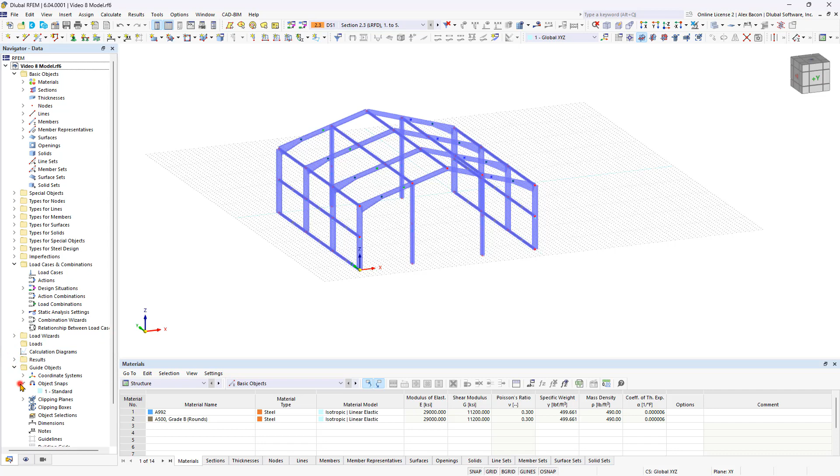In the Data Navigator, under Guide Objects, right-click the standard object snap to edit it. In the new dialog box, you can find the list of all available object snaps on the left. Here, you can create new ones and edit existing ones. Under Objects, activate perpendicular and intersections if they are deactivated.

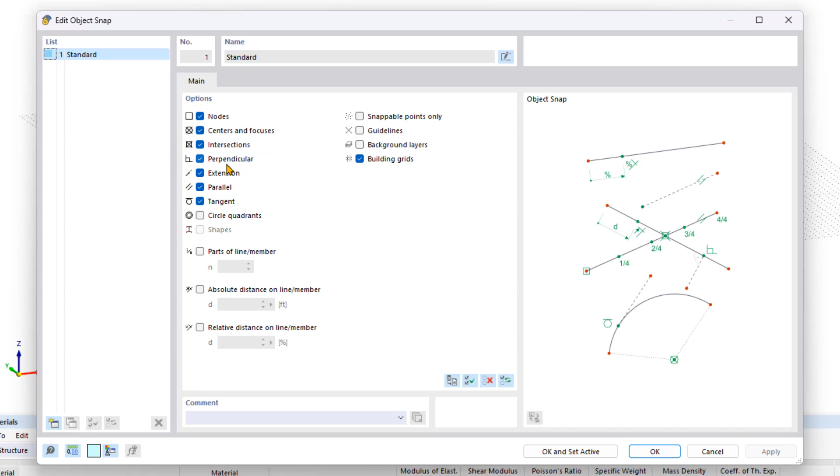Confirm the change and create a new member for the transverse stiffening. Instead of redefining the member properties, you can import the properties of an existing member by clicking the respective symbol.

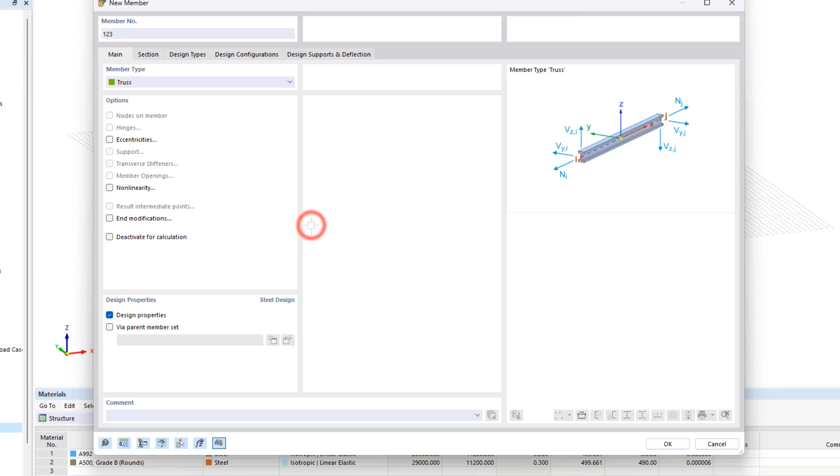Add the stiffening members to the structural model by clicking the desired points one by one, and then exiting the input by right-clicking. Ensure that you snap to the nodes and object snap marks accurately.

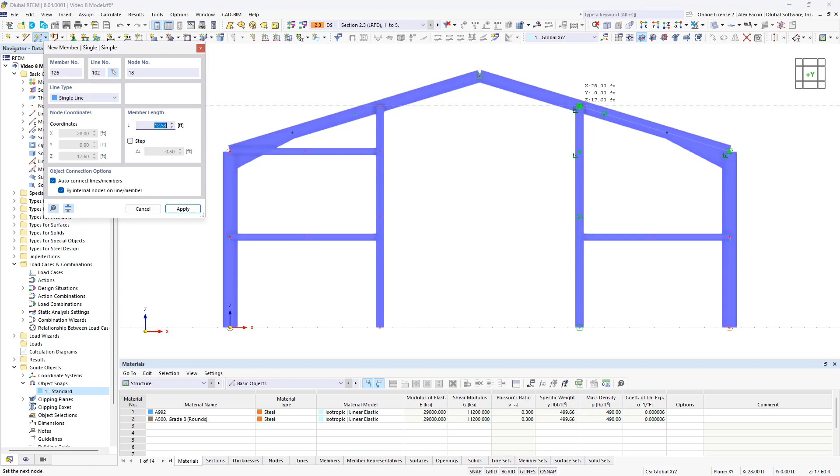By modeling the stiffening members, red nodes have now been created for two of the members in your structural model. These red nodes represent topology nodes. To assign these nodes to the columns, double-click them to change their type. In the dialog box, select the on-member node type from the list and choose the desired member and node location.

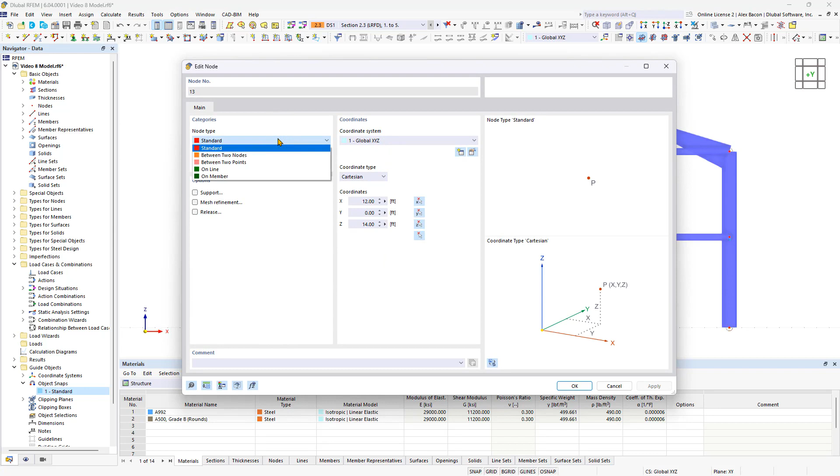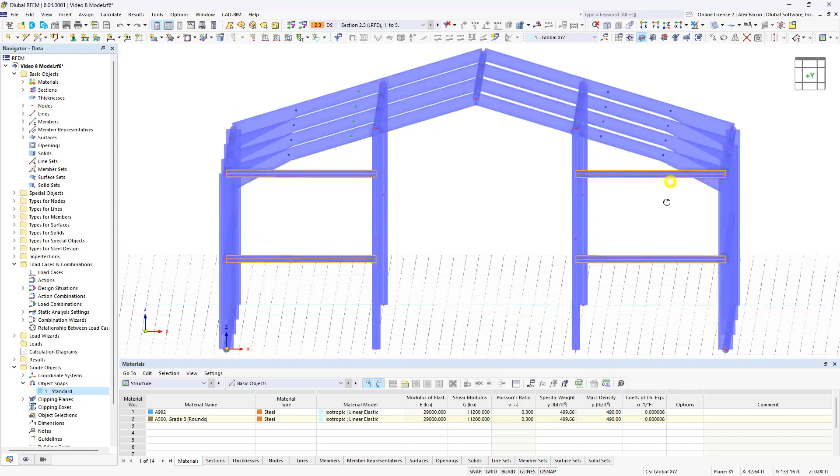Set a view that allows you to select the inner members of the frame with a single selection window. To copy them, drag and drop them to the desired position while holding down the Control key. We also need to make sure to change the copied nodes to on-member nodes as well.

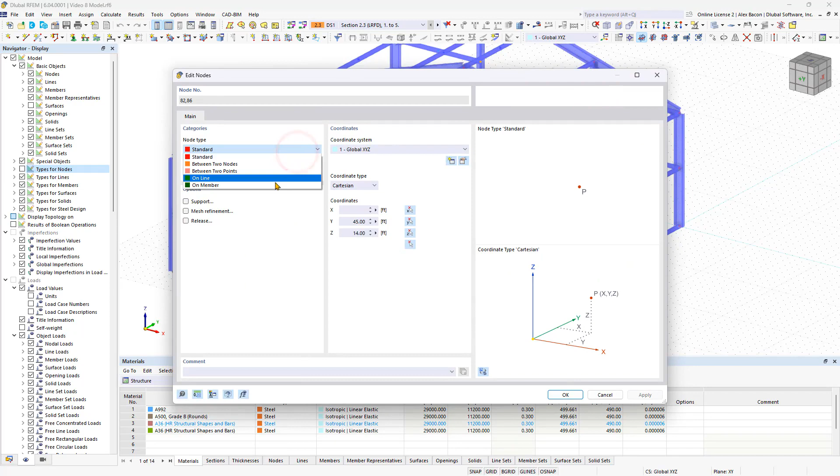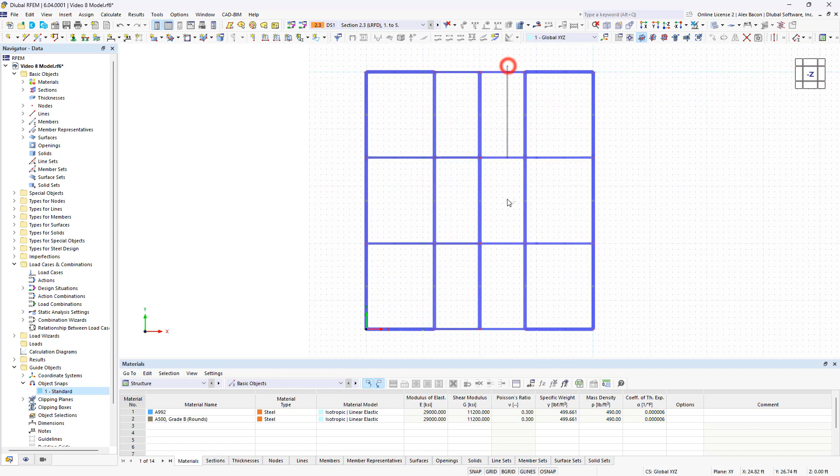Remove the tapers from the outer beams as they rest on the gable columns. While holding down the Control key, select the four members and double-click the Edit Member dialog box. In the section area, define a uniform distribution type and select a suitable section from the section library, such as the standardized W14x38.

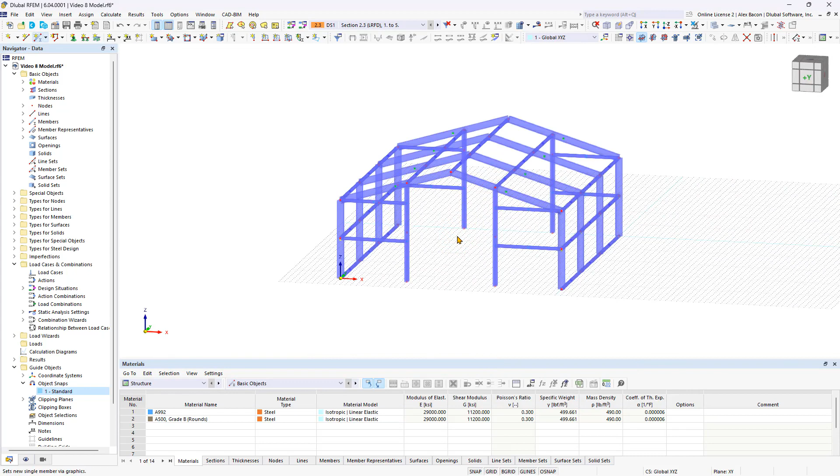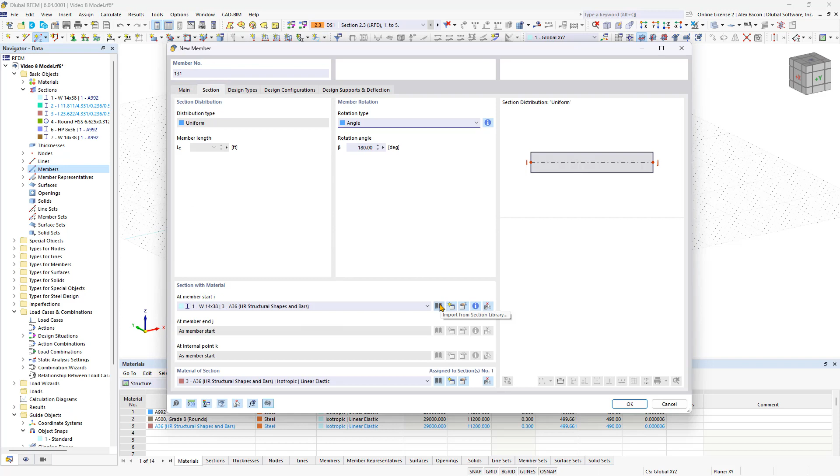To insert the stiffening bracings, click the New Member button again. Select the tension member type in the main tab, and choose a suitable section, such as a parametric round bar with 0.75 inches diameter. We also need to change our material from steel A992 to steel A36.

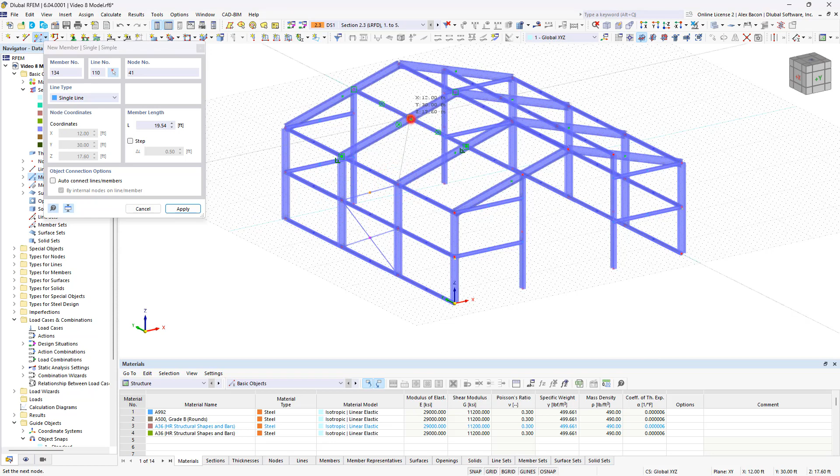Now we place the tension members diagonally in the midspan of the steel hall, making sure to select on the nodes to enter the members correctly. You can use the wireframe display to try and help with the input accuracy. If you make a mistake, you can always use Control plus Z to undo the last action or delete the wrong member using the Delete key.

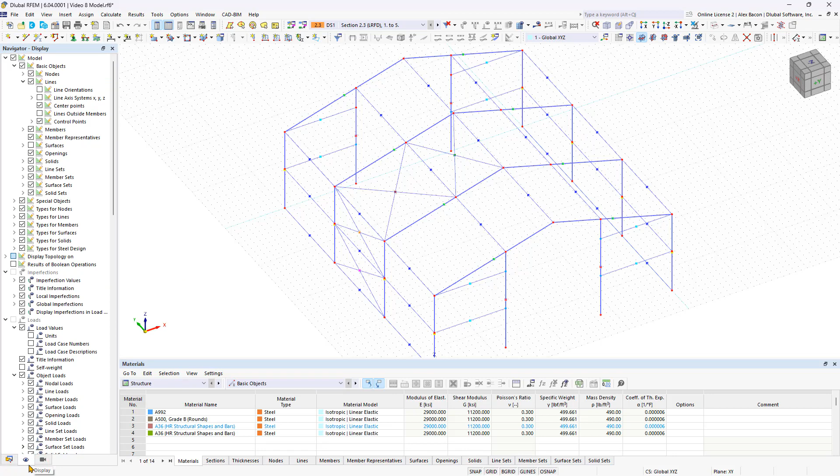To speed up the input, mirror the inserted bracings to the other side. Use the object selection to select all tension members. Create a new object selection in the Data Navigator, and then click on Mirror. Activate the Create Copy checkbox and select the mirror plane and desired mirror point.

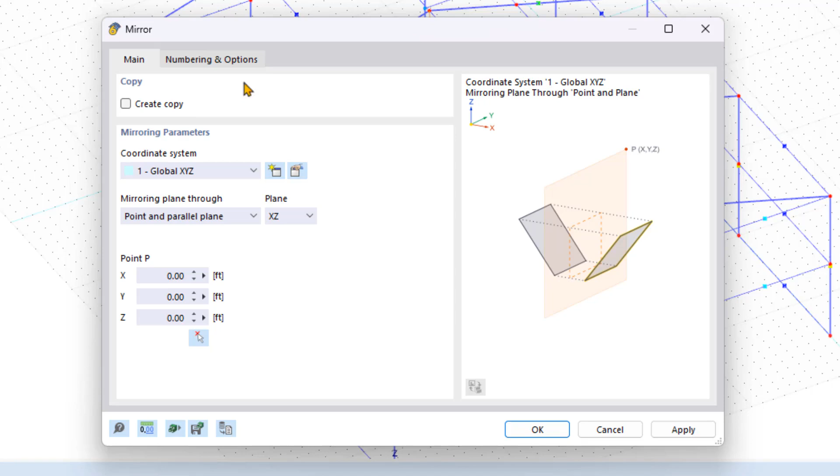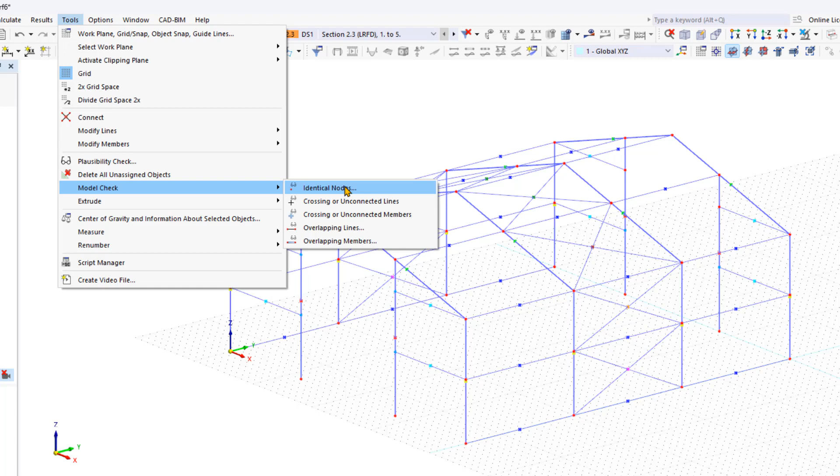Once you've finished entering the structural model, perform various model checks in RFEM to find and correct errors. For example, you can open the Tools menu and click on Identical Nodes. This is under Model Check, and this allows you to address identical node issues.

The steel hall is almost finished, and in the next video, we will learn about how to add different types of nodes and supports.